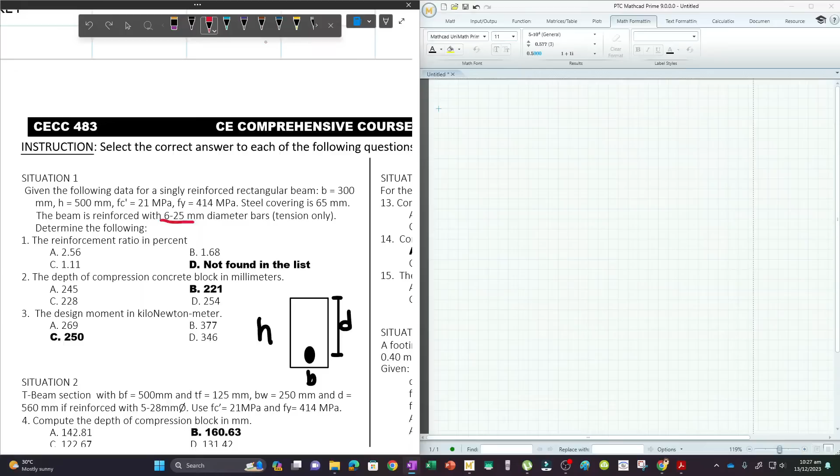Later on we'll put the given values in MathCAD. Let me draw the beam. We have B, we have H, and then we have the reinforcement here as an oval. This is D. It's reinforced with 6 pieces of 25 mm diameter bars, tension only, so our AS is 6 pieces of 25 mm. First, determine the reinforcement ratio in percent.

The meaning of that is the tension ratio, which is AS over BD. Now let's look at our given values. Our B is 300, our H is 500, our FC prime is 21, and our FY is 414.

Since our FC prime is 21, that makes our beta equal to 0.85. The steel covering is 65 mm, which is this distance, and we'll call that CC. So CC here is equal to 65. Our D is equal to H minus CC, so H minus CC, which is 435.

Now for number 1, that's simply AS over BD. Our AS is 6 pieces of 25 mm, so it's equal to 6 times pi over 4 times the diameter squared, where diameter is 25 mm, and that's dB. Our number of bars is 6, so we list the number of bars multiplied by the area, where area is pi over 4 dB squared, divided by B times D. Press equals.

Our answer is 0.023, so that's not found in the list. Now, we can already tell conceptually that this reinforcement ratio cannot be greater than 1, because if it's greater than 1, that means your steel is more than your concrete, as if it's all steel.

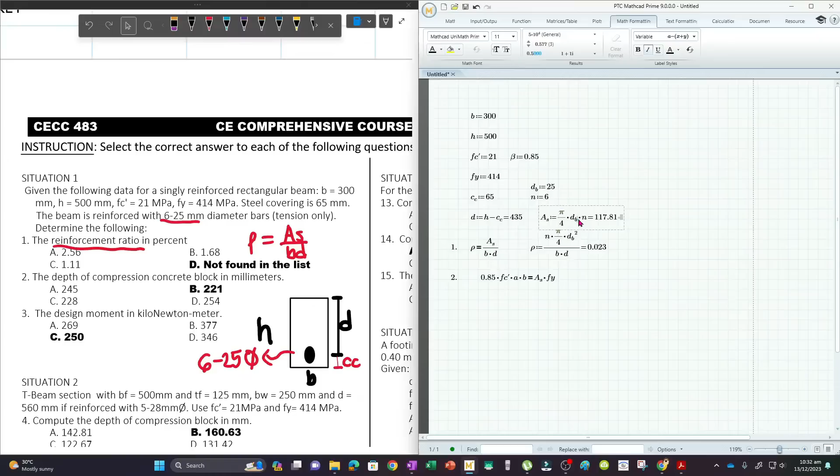Now let's try to solve for A. It comes out to 227.69, which is among the choices. But that means this is the trap answer found in the choices.

Because if we check the yielding: A is equal to beta C, so C is equal to A divided by beta. Our C will be, let me store A. Our C is 267.882. Now let's check Fs. Fs is equal to 600 times D minus C divided by C. That comes out to 374, which means Fs is less than Fy, so it does not yield.

Since it did not yield, we have to recompute for A and C. Let's use the same equation, but this time, A will be replaced by beta C, since our formula is A is equal to beta C. And since it did not yield, we cannot use Fy.

We will actually use this formula for Fs, the actual steel stress. Let me copy this and put it here. Then let's solve for C, clearing A and C. So we have two values.

But the negative value is not valid, so we assume that all numbers are greater than 1. Let me store this as C, giving us the new value of C. After that, let's solve for A, since A is equal to beta C. It comes out to 221, which is letter B.

For number 3, automatically MU is equal to phi times ASFS multiplied by D minus A over 2. Now, regarding FS, we found out that it did not yield, so we cannot use Fy. I'll clear Fs here because we are not using that Fs, since it was based on the assumption that it yielded, using Fy.

So let's recompute for Fs. Fs is 600 times D minus C divided by C. And that gives us 402.39.

So there's no yield here. And since there's no yield, that means Fs is lesser than Fy. This means our beam is compression controlled. And if compression controlled, we will be using a value of phi equal to 0.65. So our phi is 0.65.

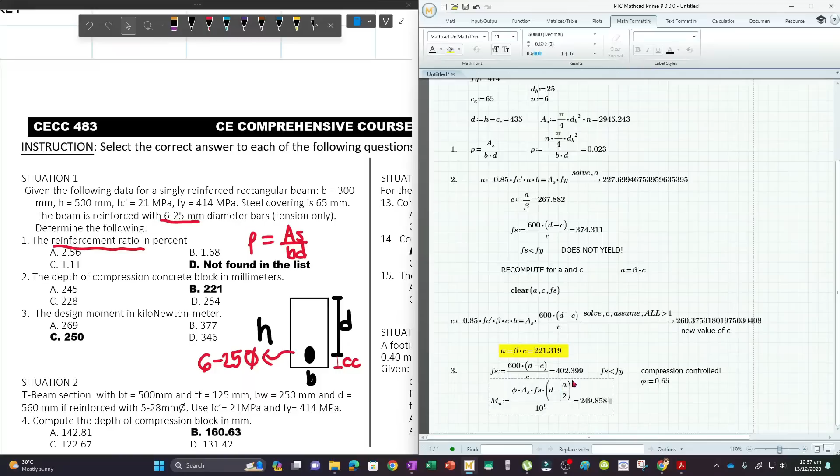That's it. And then, pressing equals, we can get the design moment. We divide it by 1,000 squared or 10 to the power of 6 to convert it into kNm. So we have our answer of 249.85, or basically 250.

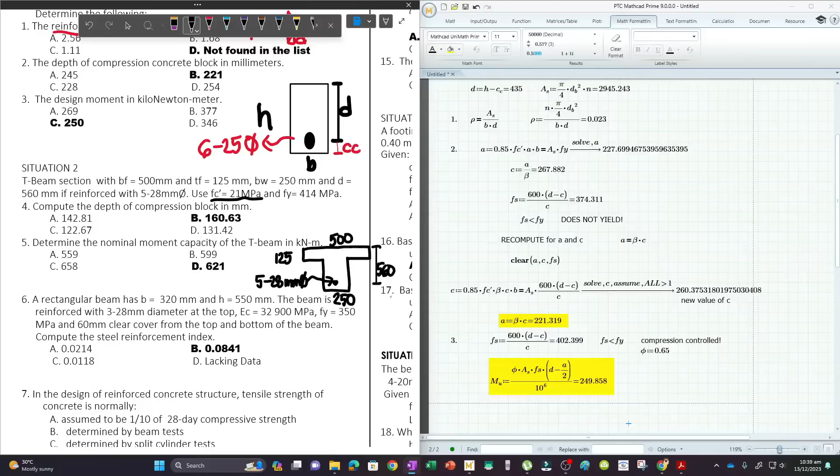So we have to compute now the depth of the compression block. Again, since it's a T-beam, we will first assume that A is lesser than T. So we consider that portion as the compression block. Let me use a different color for that. That's our initial assumed value of A. Looking at this figure, we can see that we assume the steel will yield.

So we can say that AsFy is equal to 0.85 times FC prime times A times B. Let me clear the variables above: A, C, beta, As, Fy, FC prime, Fs, d, and rho.

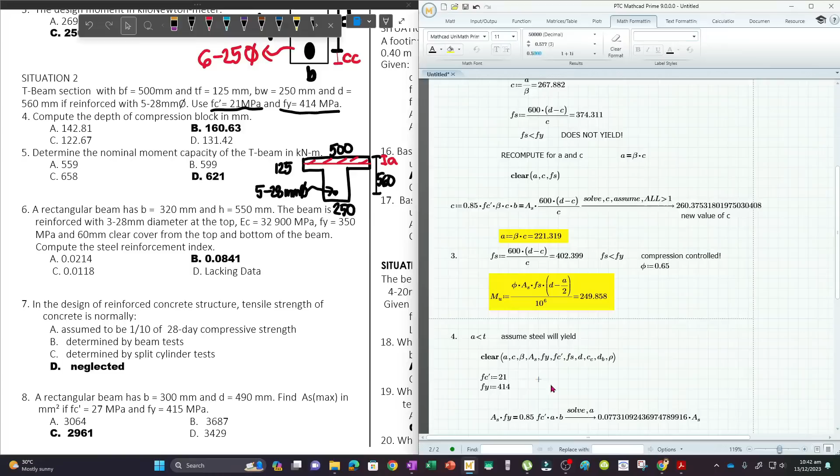So let's solve for A here. Let's substitute our values: FC prime of 21, Fy of 414, and steel area — I'll automatically assume 5 pieces of 28 mm bars. So pi over 4 times 28 squared. And so we compute that A is 142.81, which is greater than 125.

So our assumption was wrong — A is actually greater than T. That means we will analyze this as a T-beam. The computed A turned out large. So now B becomes the BF, considering this portion. The BF is that 500 at the top. So let's write down the BF.

BF is equal to 500, and our BW is equal to 250. I'll also put the thickness, which is 125, and our effective depth is 560. So now we can compute the initial value of A, and we'll find out that A is indeed still greater than T. So we analyze this as a T-beam.

So the equation we'll use is the one for T-beams. Let's define the areas we're considering: this BW times A for this portion, and then we also have another area here.

This A is no longer this one, because A will actually exceed the thickness, so it lands somewhere down here. This is our A, and this yellow area is simply A times BW — that distance times the depth of the compression block. And this overhang of the flange has the formula BF minus BW multiplied by T. That's from the T-beam discussion. So our equation becomes AsFy equals 0.85 FC prime multiplied by A times BW for this yellow portion, plus BF minus BW multiplied by T for this overhang, the blue portion.

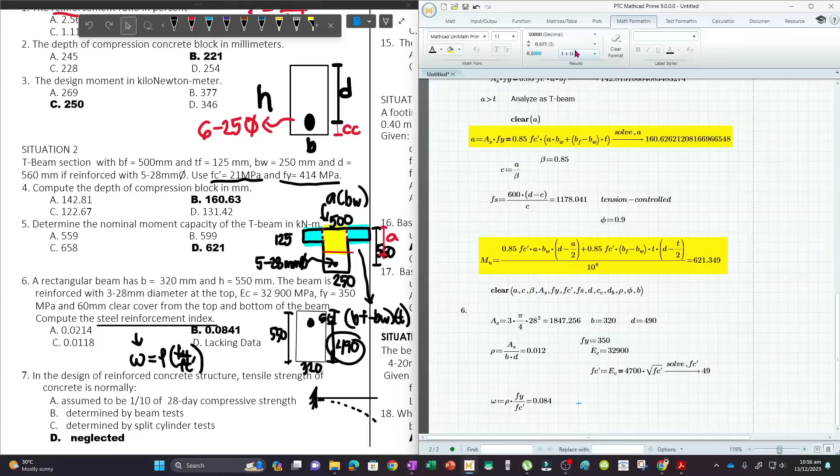May mo siyang 0.084. So, ang decimal, 4 decimal places man dire, ako lang i-5 dire. So, mana ni, 0.0841. And then, dirita sa number 8. Ang 8, dali ra na kay na-discuss naman po ko ni sa lain nga item.

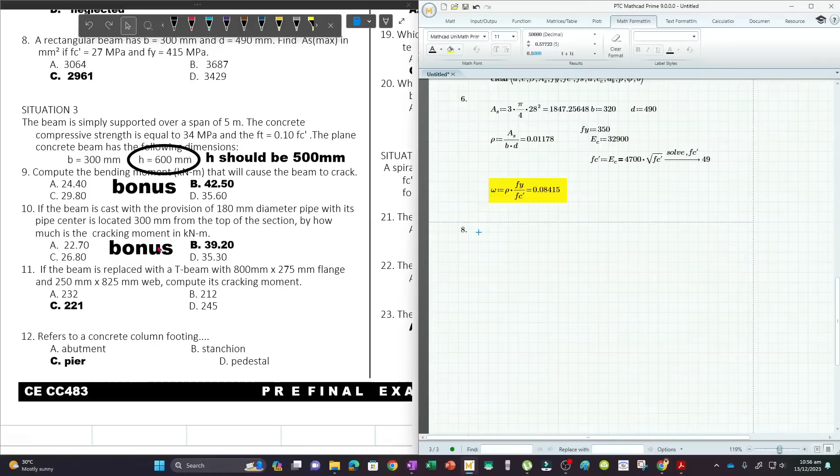What we will be using ra is kato siyang C is equal to 3 over 7 times D. Na ako ni-clear balik tanan. Ang atong D dire kay 490 daw. Ang atong B kay 300. So, find AS max daw if FC prime is equal to 27 and FY is equal to 415. So, kato ra, AS FY, nga na natog AS max times FY is equal to 0.85 times FC prime times beta C. Again, kay C man atong limitation ani.

So, ang beta din nato kay 0.85 because ang atong FC prime 27 man. So, balig kani siya may mong beta C and then multiplied by B. And then let's solve for AS max. May mo siyang 2961 which is kanira siya.

And then next, dirita sa situation 3 which is cracking moment. The beam daw is simply supported over a span of 5 m and then the concrete compressive strength is equal to 34 MPa. So, for number 9, we have an FC prime of 34 and FT na to kay 0.10 FC prime. Ang kanisang FT, mura ranig ang bending stress sa cracking ba? Balig, tension nga limit sa stress ba?

Now, para di na mo mag-memorize og formula, ingnan na lang tamudaan unsa ni siya paggamit. Ang kanisang cracking moment, mura ra na siya magamit ra kag katong MC over I ba? Diba? We know nga ang bending stress katong FB ba is equal to MC over I man, diba? So atong gamito na mao ra gyapon.

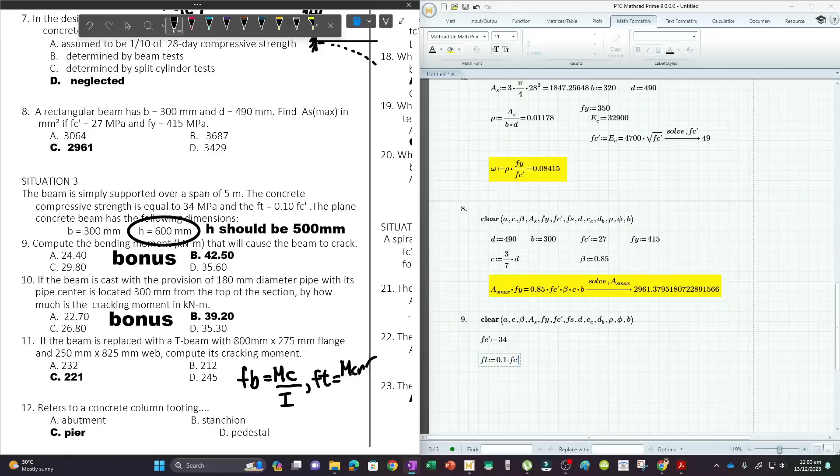But kani siyang FB, ang pagsuwat ani niya ba sa cracking moment nga problem kay FT na siya. And then ang pagsuwat sa M kay MCR, which means nga cracking moment. And then usually ang ibutan diri sa C kay ang ihatag kay Y sa tension. Kay we are interested man sa tension nga side for cracking. And then divided by the gross moment of inertia. But basically ang kani siya MC over I ra gyapon na.

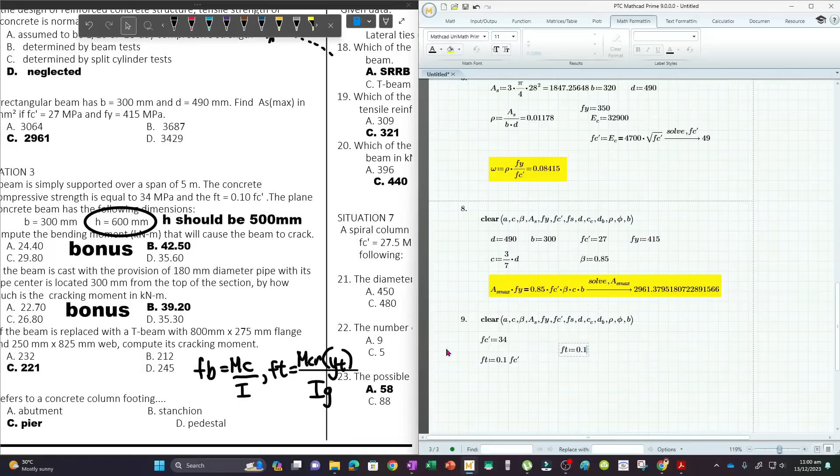So let's first define sa pila atong FT. Diba our FT is equal to kani siyang 0.1 FC prime. 0.1 FC prime which is kana siyang 3.4. Ano naman diri no? Kana. And then we have B nga 300. Na ako na i-draw sa move na lang ko ni taas. Let's try to draw this one.

Diba? We have a B nga 300. Sibog lang ako. 300. And then, we have a height nga 500. So, diba? Dali rin siya kay MC over I rata. And then, it's easy to identify man nga ang neutral axis ani will be dirira sa center gyud because rectangular raman. So balik ang tension nga side nato will be kani diri sa bottom.

But ang C man gud pwede man gud nga naa sa compressive side ang mas taas ba mo na ang labeling jud diri kay YT lang gyud. But still bending stress ra gyapon ang consideration. So mo ni siya atong YT. And so diba FT is equal to MCR or the cracking moment multiplied by YT which is essentially half ra sa 500. So 250.

Ako nalaibotan diri nga ang B na to kay 300 and then our H is 500. And so mahimo ni siyang MCR times H over 2 because mao ni siyang distance kaning YT. And then divided by the gross moment of inertia which is for a rectangular section BH cubed over 12 ra. So BH cubed divided by 12. Again gikan ra na siya sa FT is equal to MCR times YT divided by IG.

Kana siya. So, let's try to solve for MCR. Now, ang nigawas, dako na value because i-multiply pa nito siya 1,000 squared para ang MCR may mong NMM kay para makonsistent ang atong units. So, times 1,000 squared di siya. O mana, 42.5 atong answer for number 9.

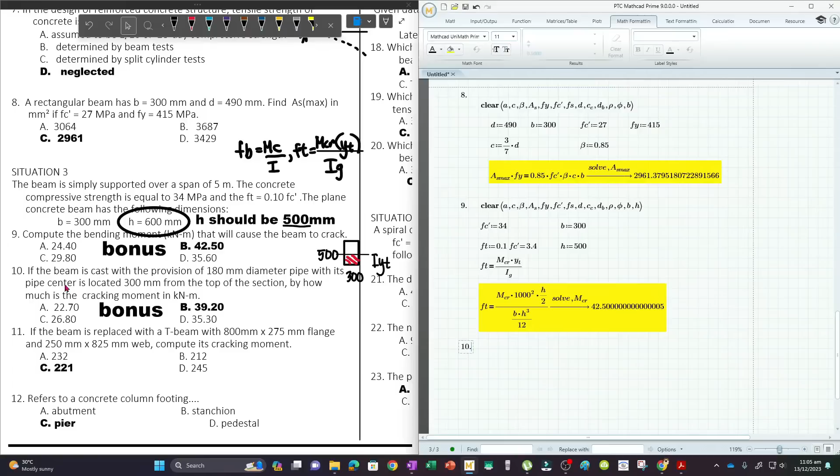So, ato i-draw atong figure sa, diba, it's still the same nga. 300, ako lang ni inat. And then, by 500 ni. Yan na, I hope agree ra.

Now, a 180 mm diameter pipe is placed 300 mm from the top of the section. Let's go back to this portion of the drawing, 300 mm from the top. That's where the pipe is placed, so that portion will be hollow. This is 300, and then we place a pipe there.

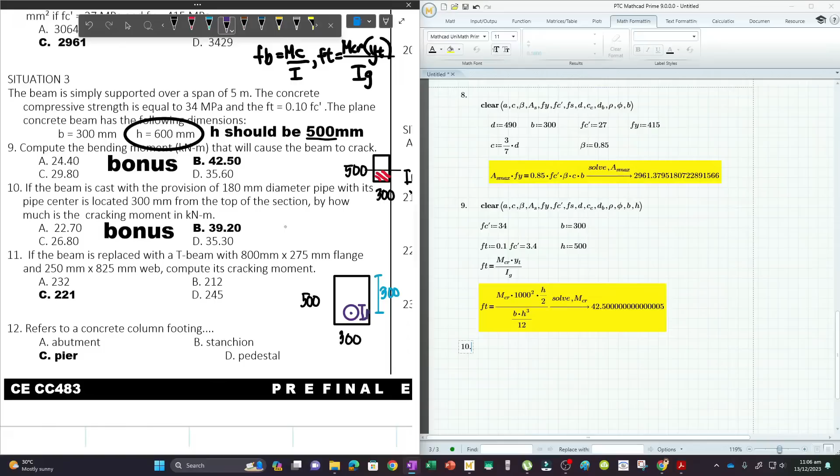So this is the center of our pipe, and the diameter of this one is 180. This distance we will also label as 200. So now let me erase the computations we had before.

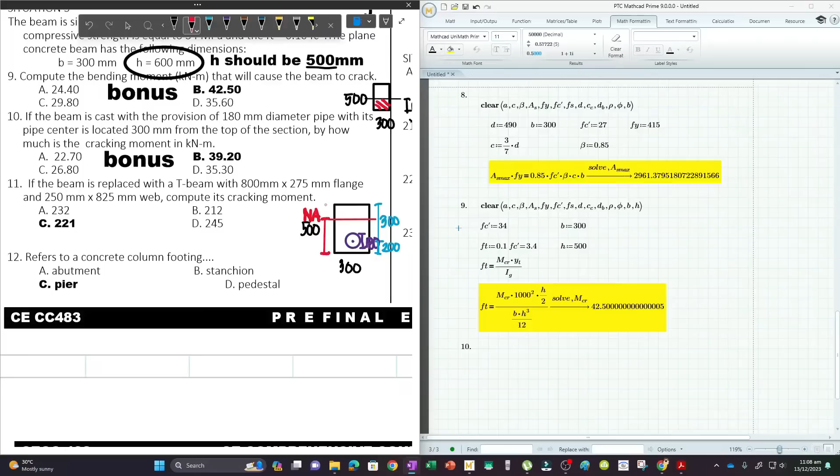So we are essentially reducing this into a statics problem, moment of inertia and centroids. Again, this area we will subtract, the hollow one. So now let's apply Varignon's theorem.

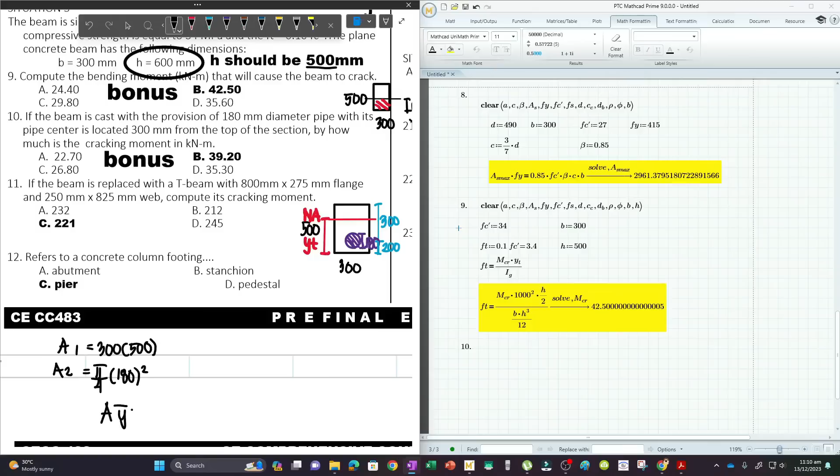For our area 1, let's consider the area of the rectangle which is 300 times 500. And for our area 2, let's consider the area of the hollow portion which is pi over 4 times 180 squared. And Varignon's theorem states that A-bar-y is equal to area 1 multiplied by y-bar-1 plus area 2 multiplied by y-bar-2.

However, since this is a hollow portion, that sign should really be plus-minus, but we will use minus because we are subtracting this hollow portion. And so we will be able to compute for y-bar from this.

This is the centroid from this axis as our reference. Let me place the reference axis here, so I'll just put everything here. Our area 1 is equal to b times h.

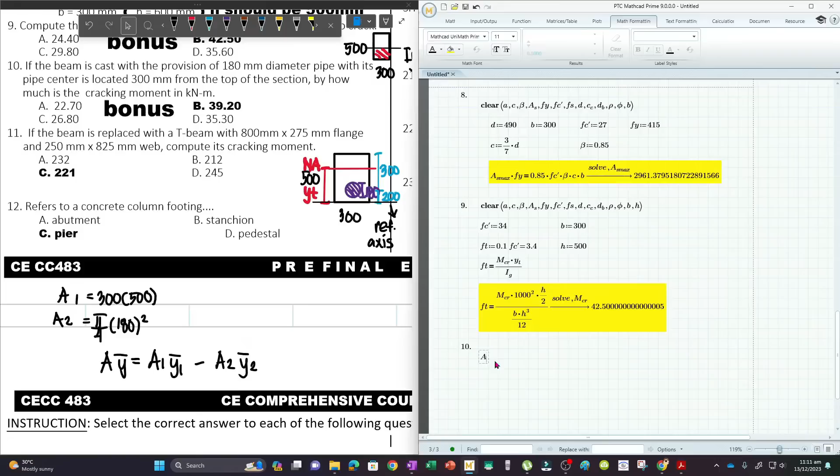We also have a diameter here for the pipe, so the diameter of the pipe is 180. And so our area 2 will be pi over 4 times 180 squared. Then our total area is simply area 1 minus area 2.

Sir, why is it minus? Again, because it's hollow, so we can now apply Varignon's theorem.

So our area times yt is equal to area 1 times y-bar-1, considering this as our reference axis. The centroid of the rectangle will be at its middle, so that means our y for that will be half of 500, which is 250. So let's put y-bar-1 equals 250 here.

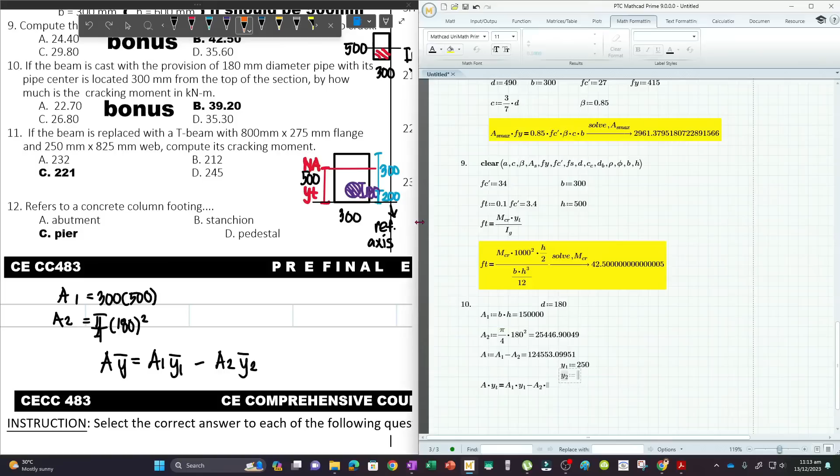And then minus area 2 multiplied by y2. Our y2 is the distance from our reference axis to the centroid of our second figure. Now the centroid of our second figure is at the middle of the circle, which is 200. So this y2 is 200.

Let's solve for yt. Solving for yt, it will become 260.215. Let me highlight this because it will be important for our succeeding calculations.

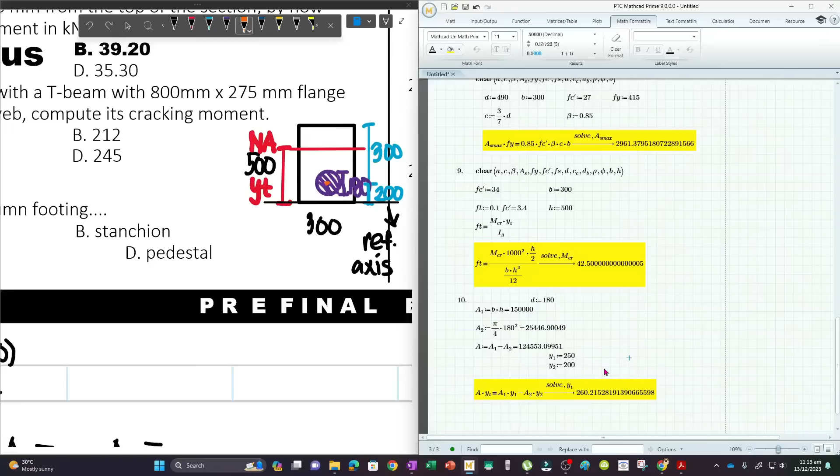So now we have yt, which we will use in our equation. We are trying to find Mcr, we already have ft but we don't have Ig yet, so that's what we'll compute next.

Now for our Ig, let me erase this. We have the I of the rectangle which is bh cubed over 12, and then minus the I of the circle which is pi d^4 divided by 64. I hope you agree.

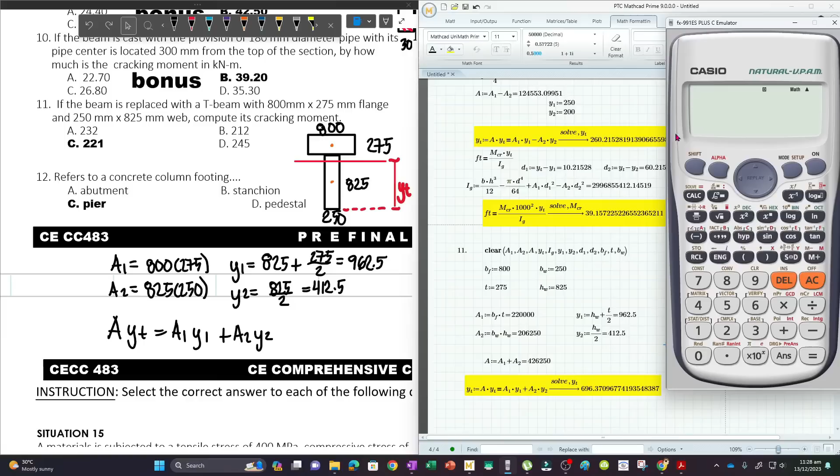So for our calctech method, go to STAT, then press 1-VAR, which is linear. Before that, turn on the frequency option - go to SHIFT SETUP, press down, then go to STAT, press 4, and turn on the frequency.

Now the essence of this is that for X you will input the distances, which are Y1 and Y2, and for the frequency you will input the area. Again, X is distances and frequency is the areas.

This will be helpful for the plastic centroid topic. So first, our Y1 is 962.5 and our Y2 is 412.5. Our area 1 is 220,000 and our area 2 is 206,250.

After that, press AC, then press SHIFT and 1 since that's STAT or distribution. It will show type, sum, distribution, data, var, min max. Go to VAR and then press X-bar.

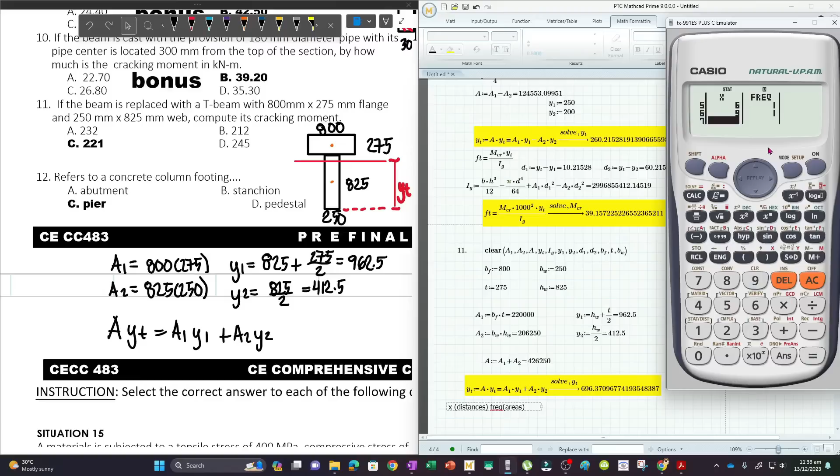You can input many areas, let's say 5 or 6 areas, then input each area and their respective distances will come out. That works too. And since we've computed YT, we will solve for D1 and D2.

Our D1 will become Y1 minus YT. Now the sign doesn't matter here, whether negative or positive. And then D2 is Y2 minus YT, which will be negative, but it won't matter since we'll square it again.

So I'll just copy the IG and list A1-D1-squared and A2-D2-squared, same as before, but now it's plus since there's no more hollow section. These are our I values for each section - different now, but essentially both are BH-cubed over 12.

However, the BH-cubed over 12 is different for each. Let's first consider the flange - our B here is the width of the flange, so that's BF, and our height is the thickness, 275.

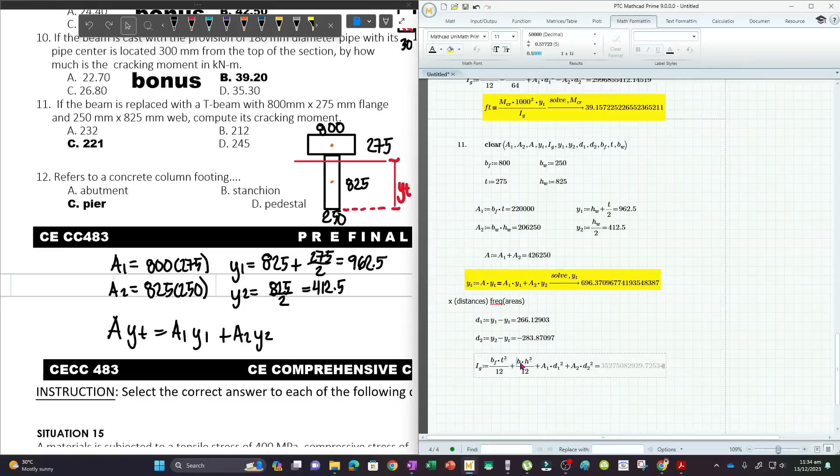And then over 12. For the web, our B is the beam width, and our H will be the height of the web. So that gives us our IG.

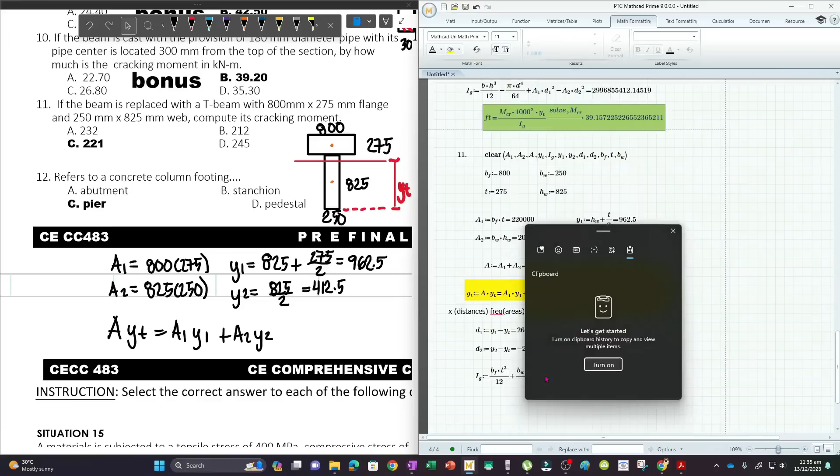So let's go back to FT, and similarly solve for MCR. It gives 221.11, which matches letter C, meaning that answer was correct. I have a video on this situation - please check it out.

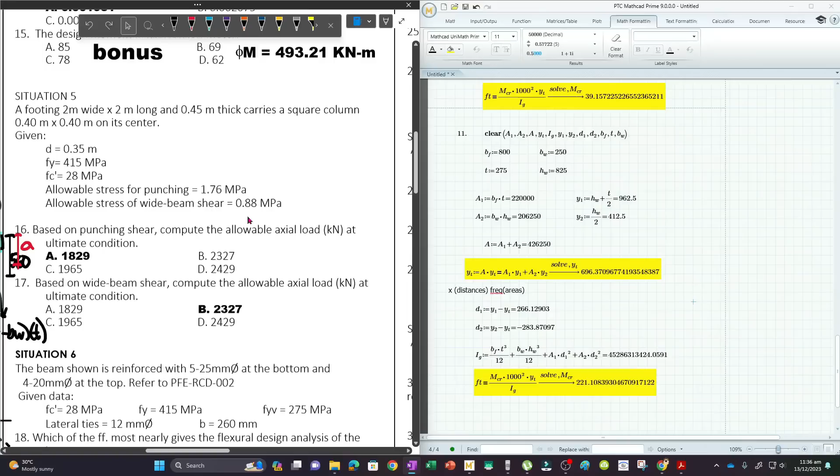Next, let's move on to the footing problems, numbers 16 and 17. Let me zoom out. A footing is 2m wide by 2m long with 0.45 meter thickness, with a square column at the center. Let's draw that figure.

So it's 2 by 2, and then we have a column at the center which is 0.4 by 0.4. The given values here are the allowable stress for punching and the allowable stress for wide beam shear.

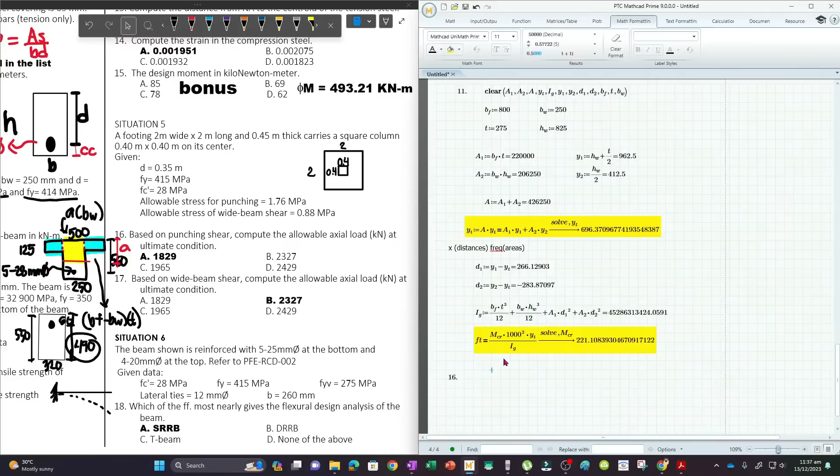Please check the shear areas from my video where I drew out what the sum of forces looks like. So for number 16, our basis is punching shear - punching occurs at a distance d/2 from the face of the support.

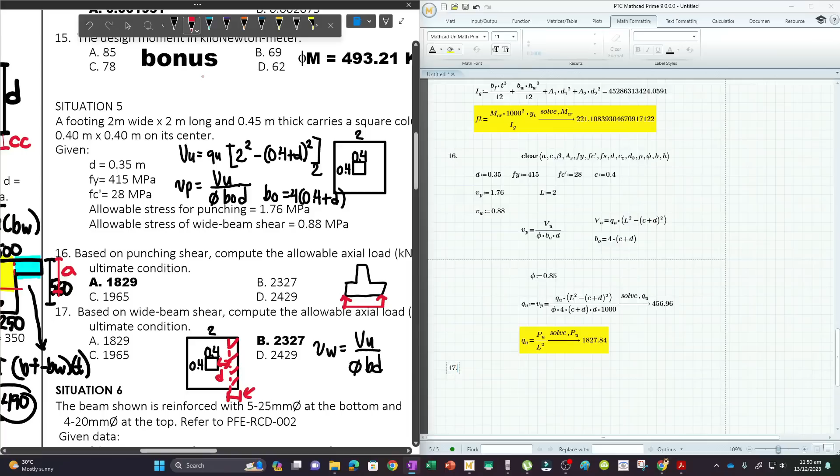Let's label this as A. Ang atong shear area is essentially the beam width multiplied by the effective depth, makita na to sa thickness sa footing minus ang covering. Ang atong VU ani kay i-check lang ang figures para sa shear areas. Kung wide beam shear, kay QU na siya multiplied by A times B. Unsa man ning A, unsaon pag-compute? Ang shortcut ani kay pwede nimo i-draw ang figure para tan-awon ang areas, pero kung ganahan kag shortcut, gamita na lang ning: ang dimension sa footing minus dimension sa column divided by 2, then minus D. Pwede ra na ingana, shortcut na lang ni. So balik, VW is equal to VU over phi BD, ang atong VU kay QU times A times B, ug ang atong A kay L minus C divided by 2 minus D. Ato na niya i-copy.

I-clear nako ang QU ug PU para mag-solve na ta sa bag-o dire. So we will solve for QU. Ang VU ani, dili siya less than, mao ni dapat, sorry. So ang atong QU is 0.581, pero kani i-convert sa times 1,000 sa ubos, so mo-siyang 581.777. Then to solve for PU, balik gihapon QU is equal to PU over L squared, o stress is equal to force over area. Copy na lang nako ni, ibutang ko dire, ug since bago na atong QU, i-store nako siya. So ang atong answer kay 2327.11, kani siya.